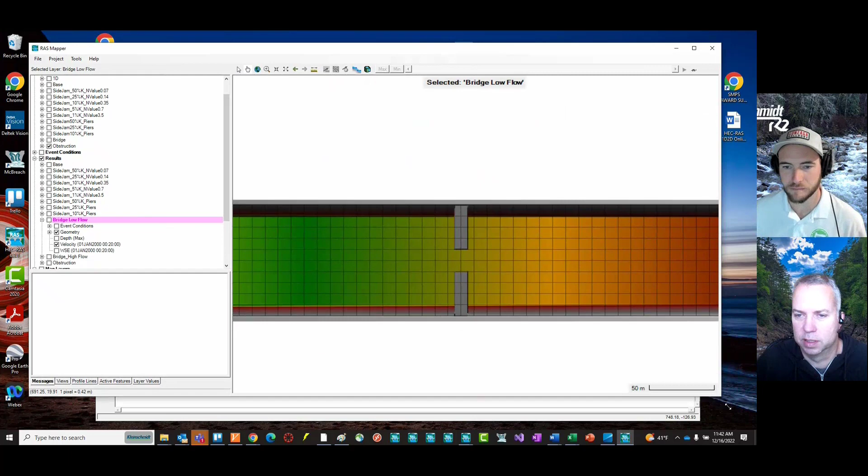Agreed. So let me pull up what I built for a demonstration here. I built what I call a flume model, but this is just a trapezoidal flume. It's 1 kilometer long, but the length is really irrelevant. It's just a trapezoidal channel, right? And so with nothing in here, it just flows straight through. Pretty boring stuff. But what if we wanted to simulate bridge embankments?

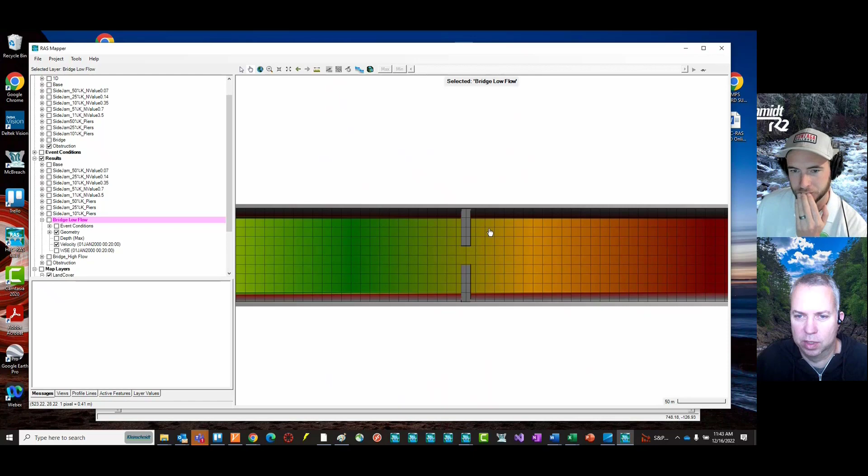And so you've got this embankment on the left side and on the right side, and you've got water that's going to be coming downstream, and it's going to contract to go through that opening and then expand out again. And we would expect to see flow in these corners that is not actively moving in the downstream direction. So let's take a look at that. So here we've got flow that's squeezing through here. And if I turn on my particle tracing, you'll be able to see that a lot better.

So there you can see how it's contracting to go through that opening and expanding at the downstream side. You can even see some eddy patterns right here. Okay, so here's the eddy line, right? And so here's the contraction. You don't really see a distinctive eddy.

Sometimes you'll see a small one in this corner here, but it's able to contract more efficiently because it's a little bit slower on the upstream side. And so usually your contraction zone is a much shorter distance than your expansion zone on the downstream. A good rule of thumb that Ben and I use is 1-to-1 contraction rate and a 2-to-1 expansion rate.

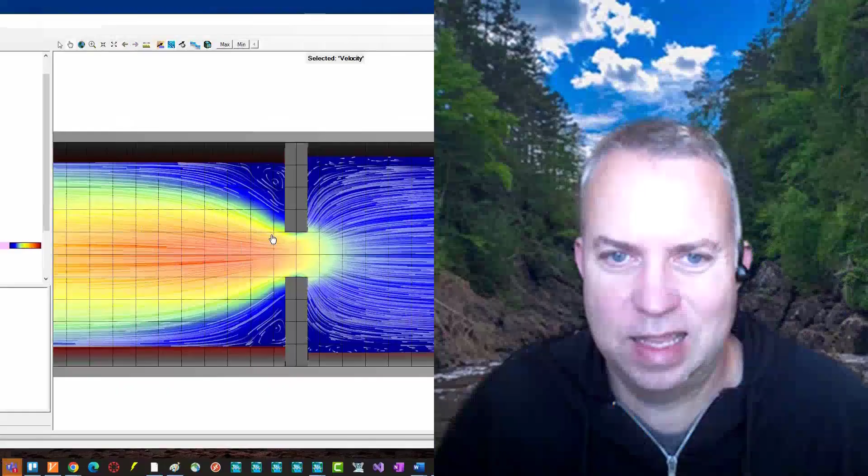That's a pretty common rule of thumb that people use, but really all bridges are unique. All flow obstructions, all contractions, expansions are unique in rivers, so you need to really decide for each case. But knowing nothing else, a good approximation would be a 1-to-1 and a 2-to-1. And you can kind of see that, right? You can kind of see that 1-to-1, 2-to-1 thing going on.

This is a more kind of academic visual of that, right? So Chris's is much more practical with that 2D model, but this is, I think, maybe directly from the HEC hydraulic manual. But this is Appendix B. The 1-to-1 slope on the upstream side of this bridge opening here, and then 2-to-1 on the downstream side.

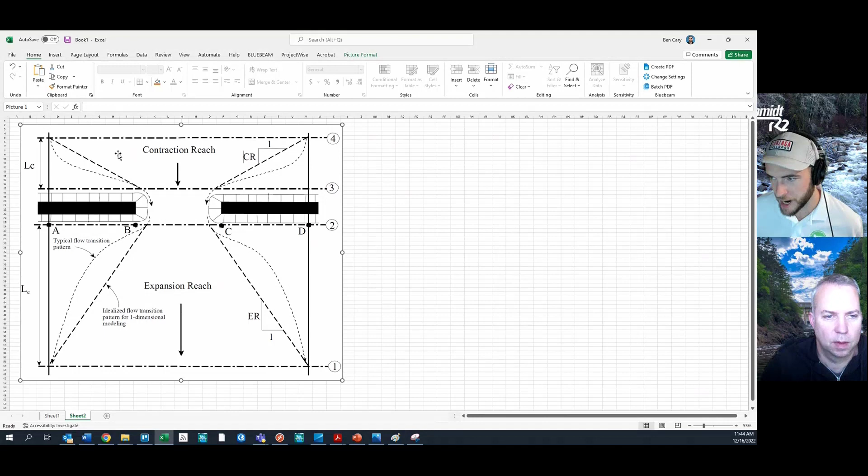And again, this is approximate, so this is a good starting point, but it also highlights how every single project, every single location that you're putting in ineffectives is going to be slightly different. You might have some skew to the bridge. There might be some blocked areas in the middle of the river channel here that change what those slopes are. But this is a good starting point if you have nothing else, and if you don't have the 2D model that Chris is showing here.

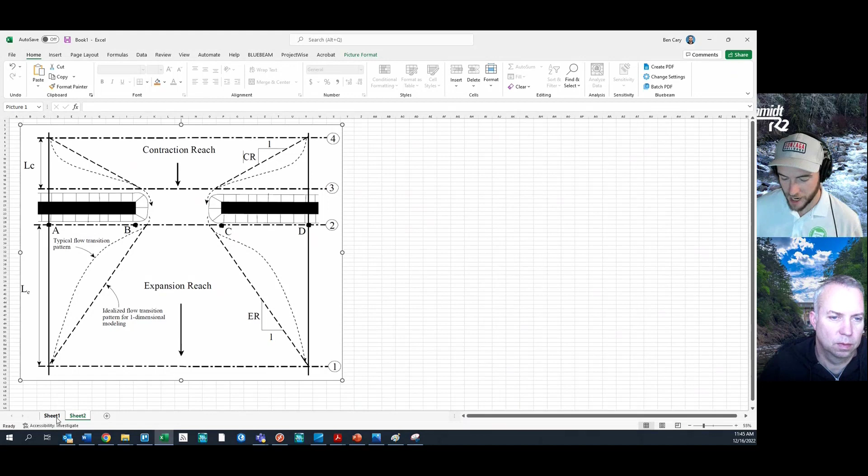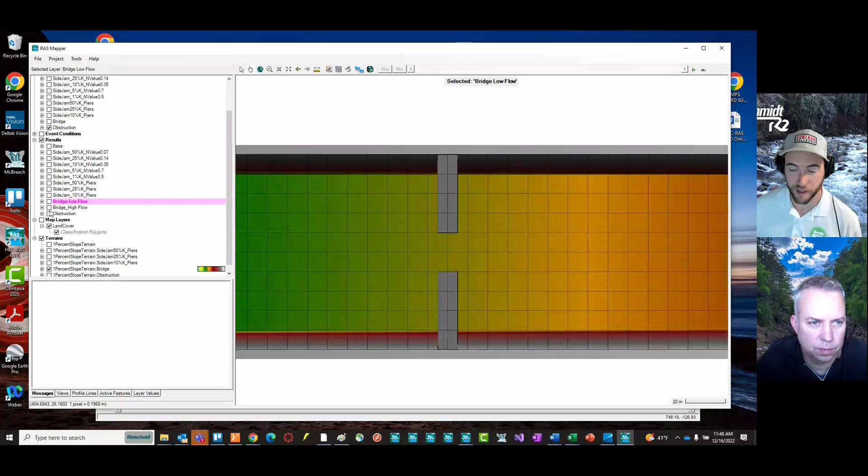So what about a case, Ben, where if the water gets high enough, it starts overtopping the bridge? Yeah, so in that case, first of all, it will drastically change your ineffective lines. And in some ways, it'll completely get rid of them. When we talk about the nuances of applying ineffectives, one of the more important things is to know what the flow level is that you're modeling, because these ineffective lines can change pretty drastically depending on what the flow level is.

When we talk about advantages of 1D and 2D and how those two types of modeling software are beginning to separate themselves, one of the real advantages of 2D is that as the flow level changes within your model boundary, your underlying terrain data and the way you have your mesh set up is going to automatically take into account how those ineffective areas change. A 1D model is going to be a lot more limited. You're going to have to be a lot more interactive with it to represent that appropriately. Yeah, exactly. So that's a huge benefit for 2D modeling.

But if you are doing a 1D model, you want to make sure that you know the elevation at which the ineffective flows will turn off. So if we go back to the low flow example, here we've got it squeezing through the opening, but as water increases in both flow and stage, eventually it's going to get high enough to go over this embankment. And that's what we're showing right here. So you would want to know, what elevation does it start to overtop? A good first estimate is, let's turn on this profile line here so you can see what we got.

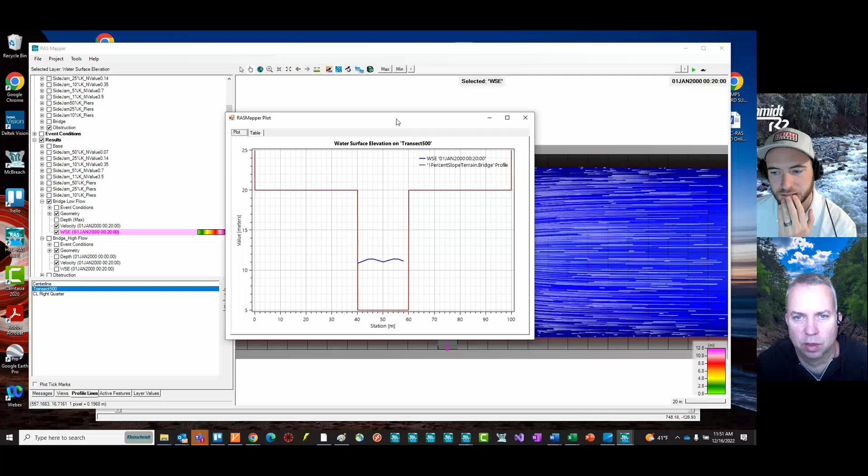And so that's how you set your elevations for your ineffective flows: when do you think that flow is going to become effectively moving downstream? That's when you want that trigger to turn off. So we've talked about how those lines converge towards your contraction or blocked obstruction, and the elevation of the ineffective flow area and when it turns off and flow starts to convey. One other thing I want to touch on really quick, Chris, if you go back to that visual, is the idea of permanency with an ineffective flow area.

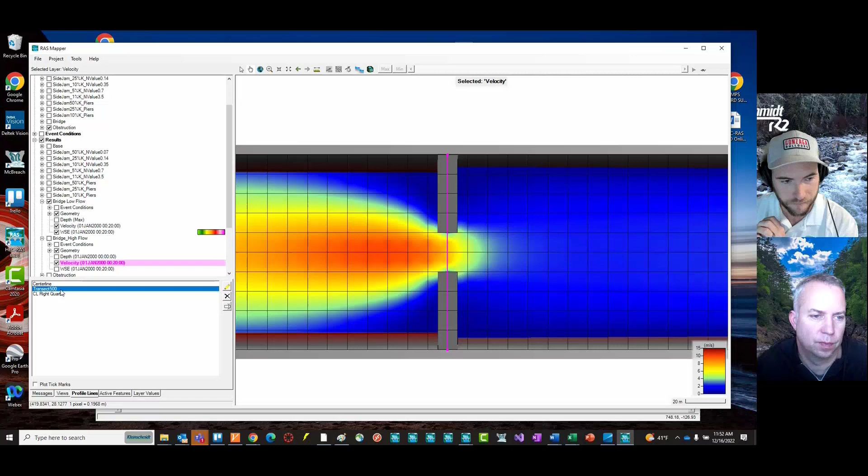So if you open up that line you just had. You're talking about this one? The profile line that showed the water surface elevation compared to the terrain. So if you look at this, like Chris noted, at right around 20 meters, the upstream area is all of a sudden going to start conveying flow towards this bridge opening, and so your ineffective area is going to be eliminated at that point, unless you assign that ineffective flow area to be what's called permanent within the HEC-RAS software.

And I know there's a lot of questions. The most frequent question that I get is, do you use permanent or non-permanent ineffective flow areas for an example just like this? And it depends on a lot of things. That's what I always tell folks. The most important thing is, what's the distance between your last cross section where you have ineffective flow areas and that structure that is causing the ineffective flow area?

Because if that cross section is right up against, maybe just a few feet or a few meters from the bridge deck or from these abutments, it's reasonable to assume that the ineffective flow area you have there is permanent, which means all of the area in this case that's being blocked by those abutments remains ineffective.

But any area that's above that, any water that's above this abutment deck in this case, would be effective. So it's kind of combining the two. And that's a realistic picture, because if you were, for instance, to swim underwater up against a bridge deck that's being overtopped, that water below the top of the bridge deck really isn't effective. It's not moving through that bridge deck. It's only the water moving over the top that's actually effective.

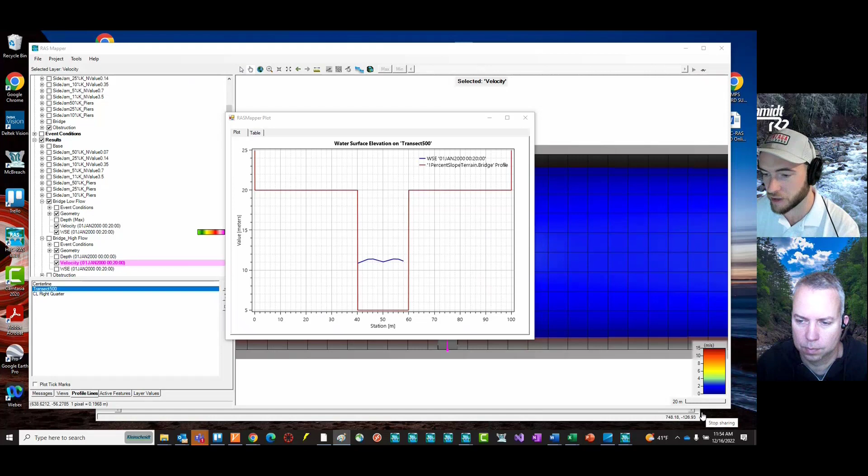However, the opposite case, where that cross section is actually further away from the bridge deck, you might have that entire water column that is suddenly becoming effective if you're overtopping that bridge. So any other thing you want to add there, Chris, or thoughts about permanency? Let me, I always like to explain this with a sketch. So I've got a sketch going here.

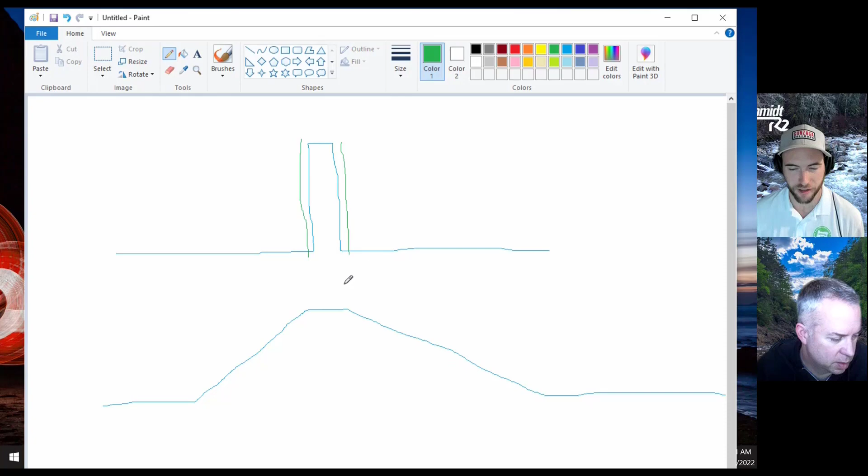And so here are the two cases that Ben was just talking about. So this is profile view, water's moving this direction on both of these examples. This is the bridge embankment where we've got vertical walls, embankment walls, and here's one where we've got sloped embankments. Now, where you're going to want to put your cross section, let's make our cross sections green, is, for both cases, you want to get them as close to the bridge, or whatever the start of the structure, as possible.

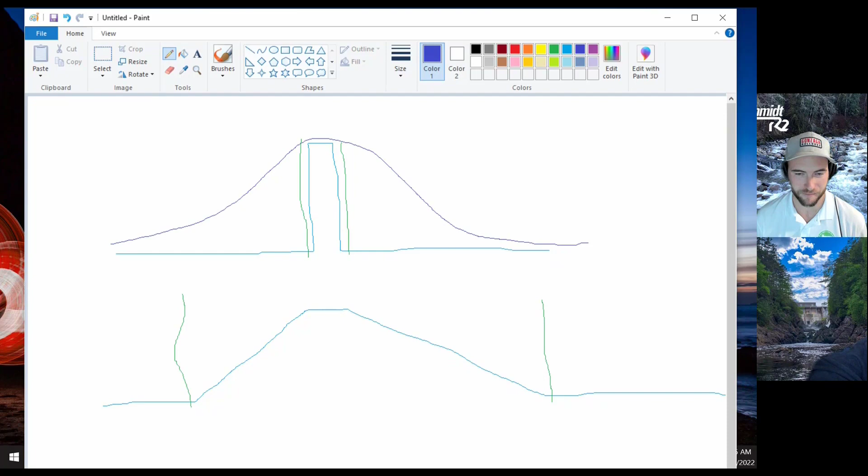And in this case, we've got all this embankment here, so we would want to put it near the toe of the embankment on both sides, right? All right, so, that's a bad cross section, but you get the picture. So again, this is profile view, so we're looking sideways at it. Now, if I were to draw the flow lines, okay, in this first example, you've got flow lines that are going to kind of do this, right? It's going to be something like that, right?

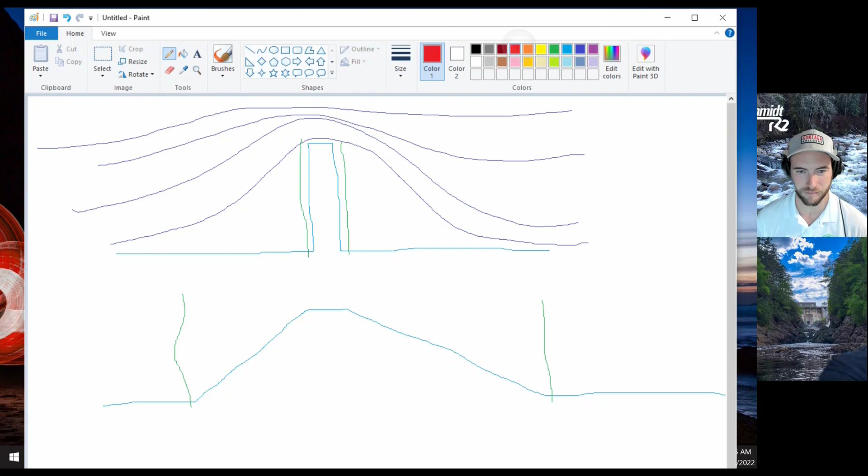So all of this over here is ineffective flow, but just kind of in a sideways perspective versus plan view perspective. So in these cross sections that I have here, these two green ones, even though it's overtopping the embankment, this is ineffective still. So we would call that permanently ineffective. Now in the case down here, if we go back and draw our flow lines again, they're going to look pretty similar, right? But because of the position of the cross section, we won't have permanent ineffectives on there.

As soon as it starts to overtop, you would want to make these non-permanent, so they would turn off, because the entire water column would be activated. Does that kind of capture what you were talking about, Ben? Exactly, Chris, this is beautiful. I have a couple things to add here. So on that upper figure, go ahead and draw another cross section upstream that we would have the ineffectives as non-permanent. So just far enough upstream and just far enough downstream. So exactly there. And then if you draw another one downstream.

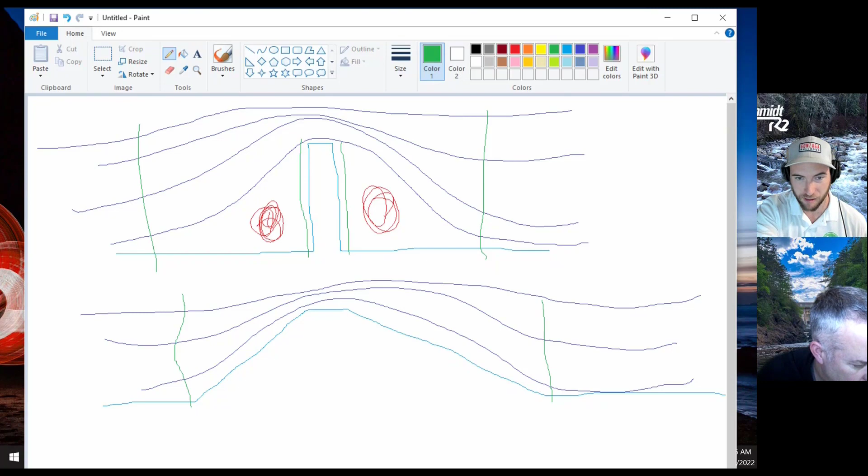So in this case, both the cross sections that are right up against the structure and the cross sections that are a little bit further out, those both might have ineffective areas drawn on them before that structure begins to overtop. But once that structure begins to overtop, now all of a sudden those outside cross sections are going to be non-permanent. So those are going to see active flow when that's overtopped.

And then the interior cross sections, because of the shape of the structure they're representing, are going to remain permanent ineffectives. And so this does a good job of highlighting how that changes versus, again, if you look at the lower figure, all your cross sections, both right at the toe of the structure as well as ones upstream and downstream, those would all be non-permanent ineffective flow areas. So this is a great visualization.

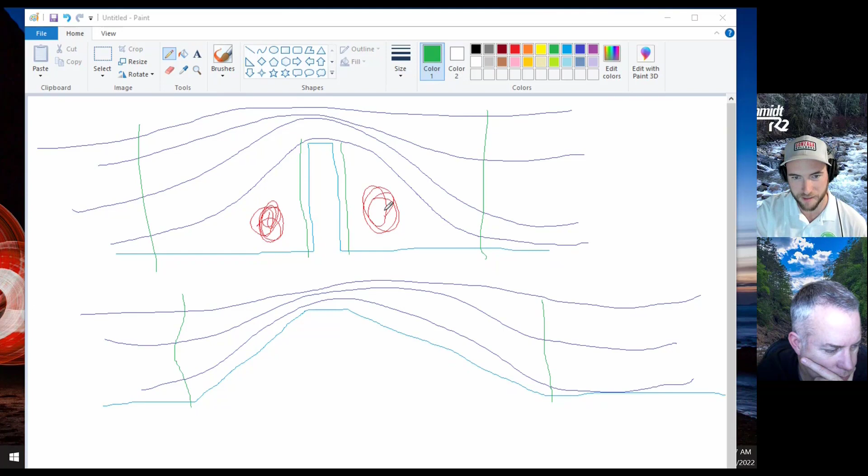The other thing I want to point out, which is fascinating, Chris, I didn't think about this until you literally drew it right here. You said that this was looking in the side view, not plan view, in terms of the ineffectives, and the red circle area that you drew represents the areas that are non-conveyant. But if you actually flip this and pretended that that was the abutment, and we're looking at it from vertically, it's the exact same. And so that contraction of flow moving over the top of this weir is almost the exact pattern that you would see of flow contracting through a bridge opening from above.

So really, no matter the perspective that you look at it, you still kind of get that similar ineffective area, either right up against the structure if we're looking at it into the page, or on the upstream side as water conveys through that contraction. So that's pretty interesting.

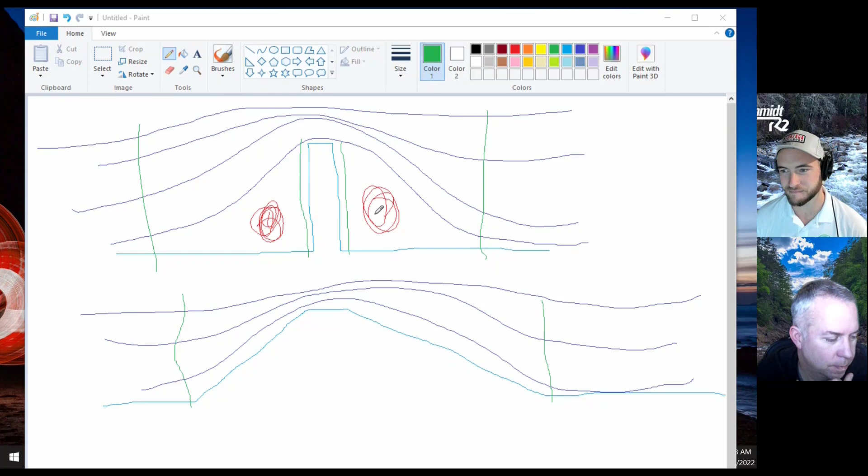So you get both vertical and horizontal contraction and expansion of flow. And we need to account for that in RAS because we have a 1D model. We don't have a 2D or 3D model when you're doing 1D RAS with cross sections. Yeah. So let me show you another example.

This is the case of an obstruction in the middle of the river. Kind of the same type of thing, only here now, instead of squeezing through the middle, you have water squeezing through the outsides of the channel. And this looks very similar to that image that I showed almost at exactly the beginning of the discussion, right? Let me pull this up here. Looks exactly the same, doesn't it?

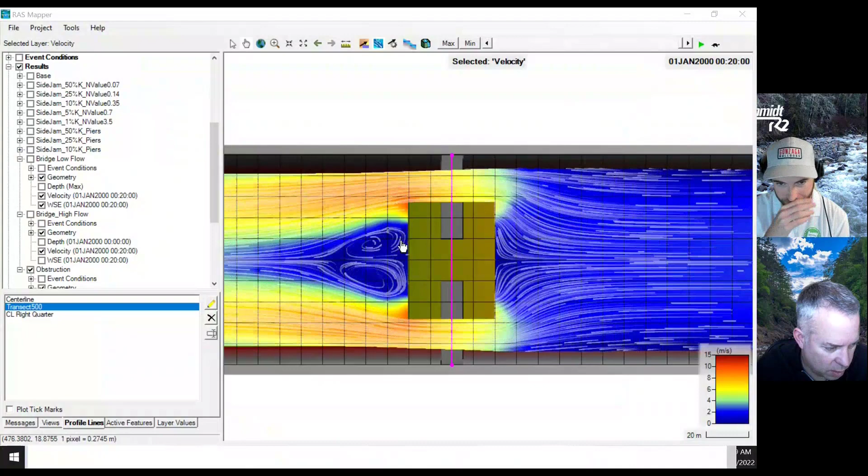And so here again, if we were to put a cross section right upstream of this obstruction, which is what we would want to do, then we've got some ineffective flow right about in here. Same thing just downstream of that. We've got ineffective flow here, and you can see this is maybe a little more than a 2-to-1 expansion. And this is probably a 1-to-1 contraction roughly. So you could set that up too on those cross sections, just like you did with the bridge.

Yep. Now, last thing I want to get into is a little bit more advanced discussion on ineffective flows and certain applications. So with that, I'm going to get back into my canvas here, do some painting. Let's get rid of all this stuff. And I'm going to draw a plan view of a river. We'll make this brown because that represents the banks. And let's say we got some kind of feature that sticks out here like this, and it comes back around and goes downstream. This is what you might call a backwater slough, right?

And we're going to have some cross sections all throughout. The water's going this direction. Okay, so let's put some cross sections. I'll put one here. Oops, I just drew it the wrong direction. I'm so embarrassed. Let's do it the right direction. You'll get a negative flow on that one, Chris.

There we go. Yeah, left to right is if you're looking downstream. Okay, so this is how I would draw these. Make sure you want to capture that feature. Maybe you got another one here and then another one right before it ends, and then another one right after, and then keep going downstream, right? Yep. And so this inside of these brown lines is all water, and you've got water actively moving downstream.

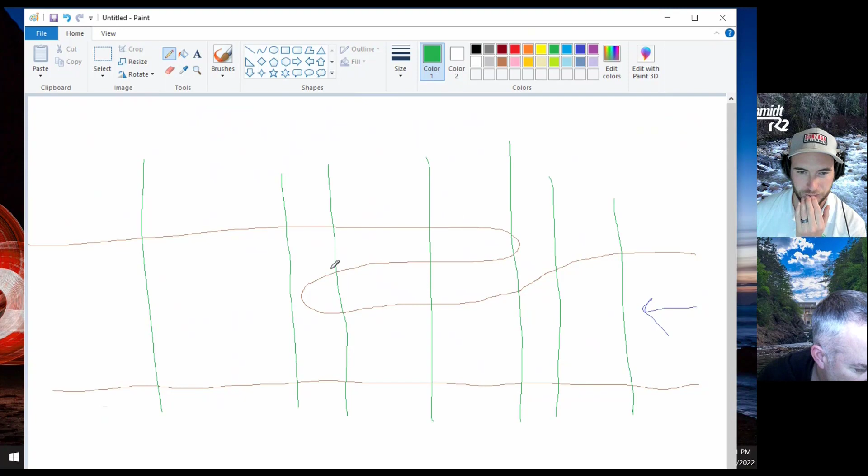But if the water's low enough that there is a barrier to flow right here, then you'll get water up here, but it's just going to be stagnant water. It's called backwater, right? That's why it's called a backwater slough. And so on these cross sections, I would want to define this as ineffective flow right here and here and here. So do you want to draw those locations where you would put those ineffective points on these cross sections? So we'll make our ineffectives in this case orange, and I would put ineffective right there.

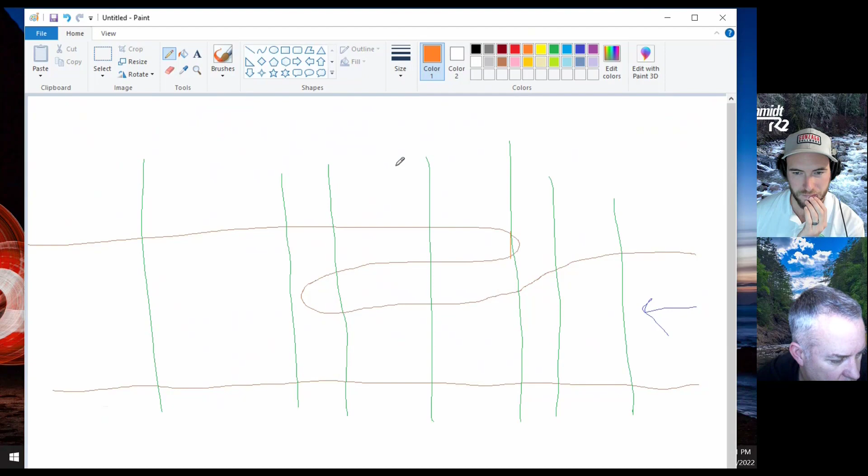Oh, let me do something different here. I'm gonna make them nice and thick so you can see it. Okay, put some ineffective. Oh my gosh, I messed that up. There, and there. Yeah, I think you get the picture. Right. So those are my ineffective zones, and I would do these with probably blocked ineffectives, or you could probably have it go all the way across, if this ground is high enough. So those are my ineffectives.

But what about the case where water starts to get a little bit higher, Ben, and now it's doing this? It's not only going downstream, but it's also coming in like this. Yeah. So now that would be again a case when we talk about setting those ineffective areas. It's going to be based on identifying that that's a backwater slough. So the location that you have is perfect, Chris. The only other thing to consider is the elevation that you have those at, right?

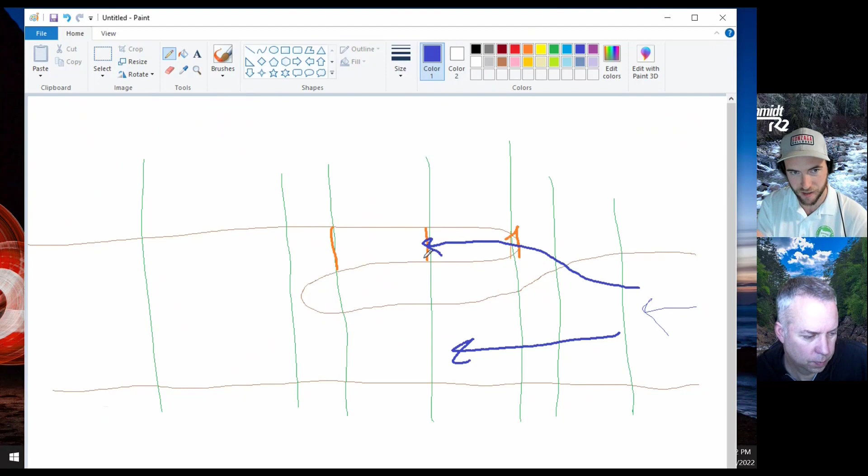Exactly. So we're going to want to tie those elevations in with the elevation of the ground just upstream of that cross section. So I don't know if you want to draw maybe a red line along that ground feature where you'd want to pull that elevation from to establish the elevation of those ineffective flow areas. So it'd be right along there, exactly.

Something there, take your best guess, but the reality is you're going to run the model and then you're going to come back and check, because what you're going to want to do is see when does water first start going over this high ground feature, and whatever the water level is at these cross sections when it first starts doing it, that's how you would set the elevation of these non-permanent ineffective flows.

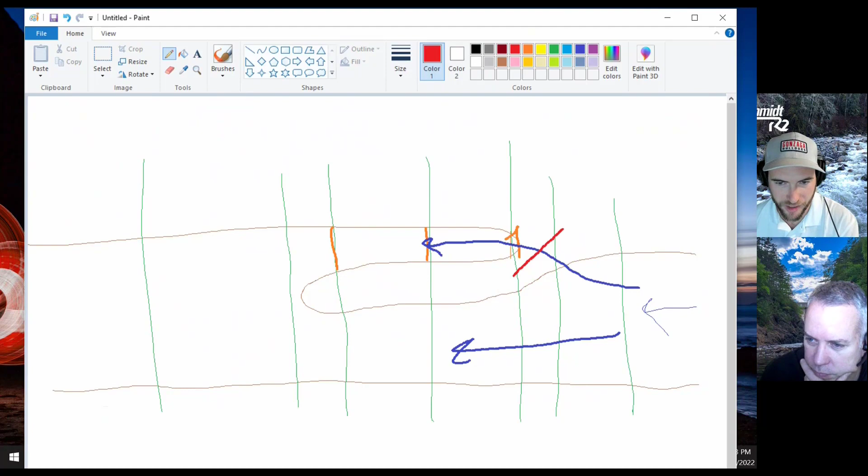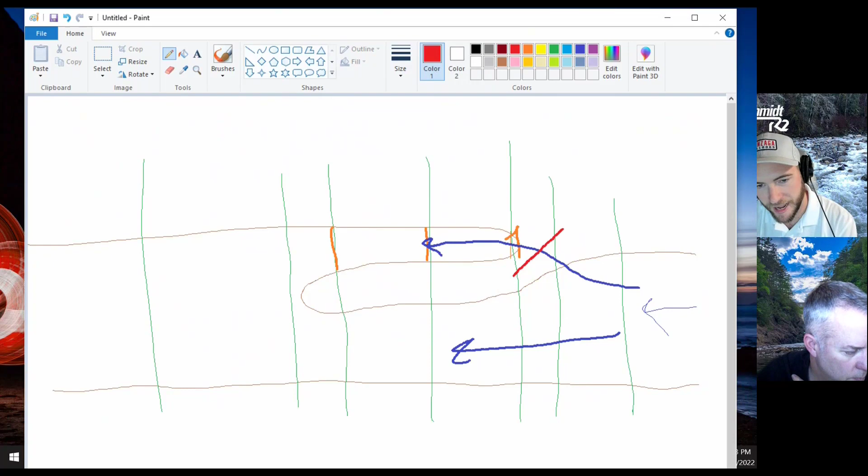Yep. And the only other thing I want to add to this particular image is one of the things that I see when I review models from people, which is oftentimes people will just go ahead and add that high ground peninsula that you have there. They'll just add that in as a levee with the assumption that, hey, water's not getting over there, particularly if that's not a backwater slough. Maybe it's just a low valley or whatnot behind there. And they add levees there to restrict water from getting over there.

But that is problematic, because if water gets high enough to overtop that high ground feature there, you're not going to be accounting for the fact that now all of a sudden that area is effective in terms of what the flow is. So let's draw your example, right? Okay. Yeah. So here we have this low area over here, right? Yeah. And this high ground, and this could be a levee, it could just be natural high ground here. And we've got our cross sections right here.

Oh, I drew it backwards again. Oops. Oh well. So embarrassing.

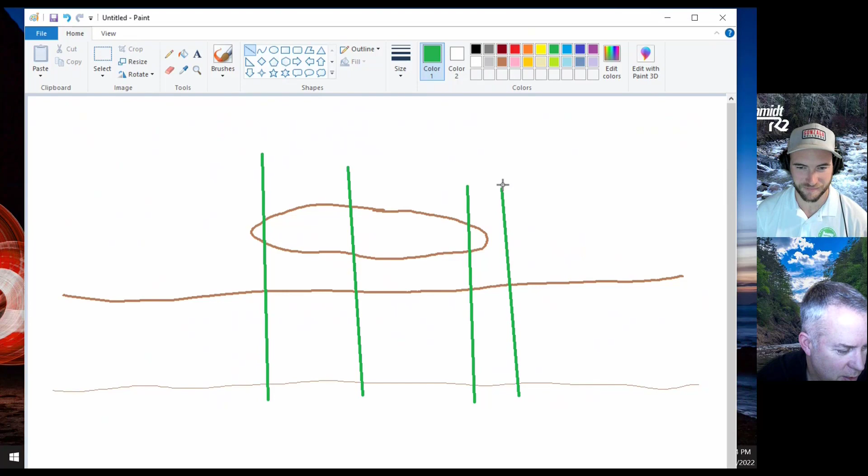Here's our cross sections, and then we got more upstream and downstream. And sometimes this is even lower than the invert of the main channel. I've seen that happen before. It gets a little bit weird. But before water goes over the top of this, we would not expect to see water in here unless there was like groundwater seeping in, right? But you would not expect water to be able to flow in here from the river until it overtops that.

And so, Ben, what you were saying is, in that case, we'll just call this my symbol for levee markers, although in RAS it's a pink triangle. But anyway, so we would want to put levee markers here, and what that would do is that would prevent water from going over into this area until the water on this side gets higher than these levee markers. Then it's able to spill over there. That's one way to do it.

But my caution with that is oftentimes people will put levees there thinking that water's not going to get over into that low area until the water overtops that levee or that bank, but they don't look upstream and see if there's a lower elevation that would actually activate that low ground feature on the right bank. Yeah. Can it do that, basically?

Exactly. I really caution folks, if you're finding yourself using levees, I caution against it unless it's a clearly defined certified levee structure, because there's a lot of different ways that water can get in there upstream, and all of a sudden that area should be conveying water and you don't have it represented as so. Because computationally, Chris, correct me if I'm wrong, you're not going to get different water surface elevations, different depths, different velocities in the channel if you use an ineffective boundary or a levee. It's going to have the same results in the channel.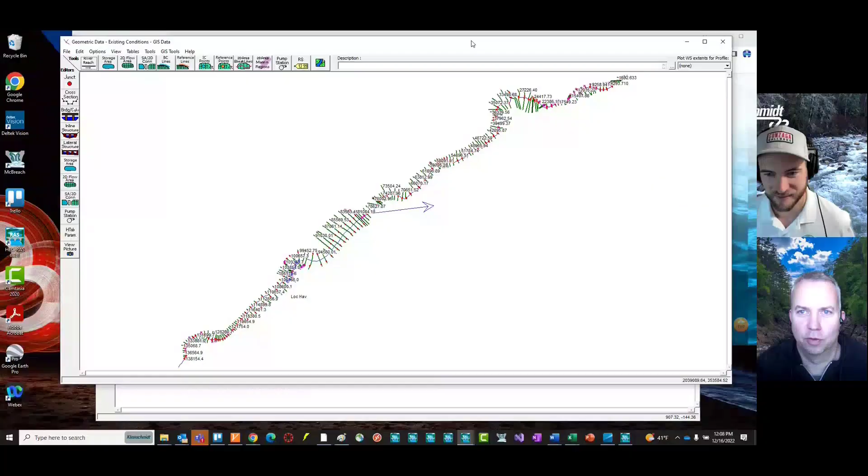Agreed. Yeah, nothing is more of a nuisance than an overcomplicated model, especially if you're reviewing it and trying to understand what the heck is going on.

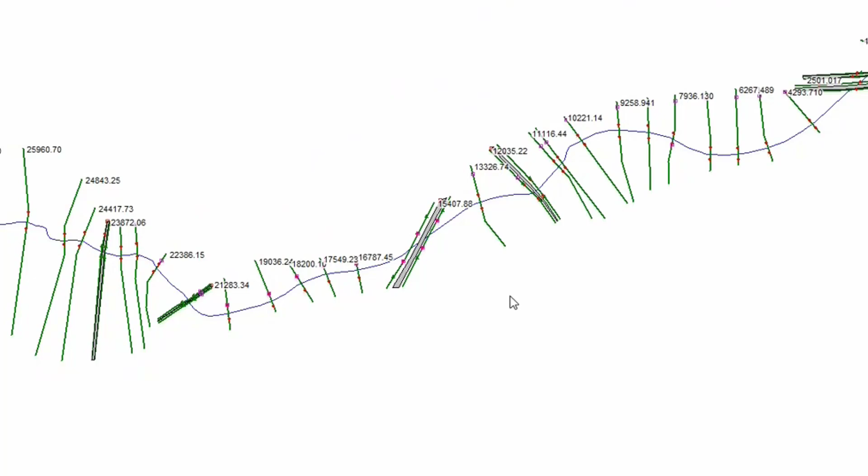But just to wrap up, this is the Bald Eagle Creek example. Everybody gets this with the software; it's one of the example data sets. If I zoom in over here, you can see these pink squares. I call them triangles, but they're actually squares. Those represent levee markers that we were just talking about. And if you look closely, you can see some green triangles around. A lot of them are on either side of these bridges that you see here. Those are ineffective flows.

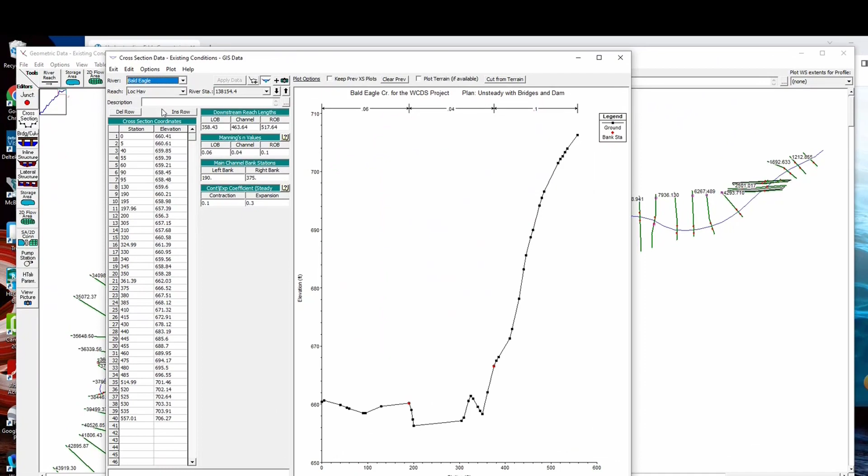So how do you set your ineffective flows? Well, there's a few ways to do that. If you go right into the cross-section editor, you can see under options, there is ineffective flow areas. And this pulls up what I would call kind of the old school way of doing it, where you type in your left and right stationing for your ineffective flows and the elevation that goes with it. So if I wanted to put something around, say, 180 and another one around 320, and then maybe I set them both at 670 for my elevation, click OK. And there's my ineffective flows.

Okay, that's saying everything to the left of this one and everything to the right of this one is going to be ineffective until the water gets above that level. Unless you go in, let's double click on this. This will take us back to the ineffective editor. If I turn these to permanent, now they will remain ineffective even when the water is above it.

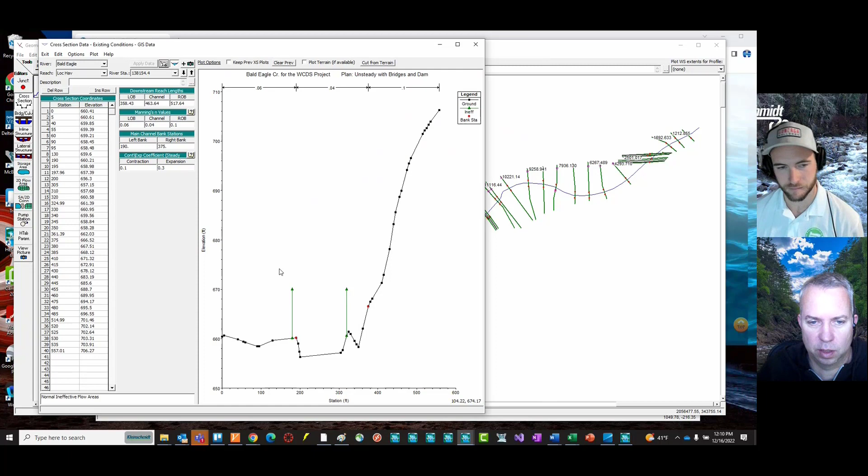Okay, so if you click OK, Chris, you can see the visual difference too, because I believe that area becomes hatched. It does once you have output. Because I haven't run this yet, it's not going to show it as hatched yet. But yeah, you're right. If the water's up above it, it will show this as a green hatched out area if it's permanent. If it's non-permanent and the water's above it, then that hatched area will go away as soon as the water gets above these elevations. So that's kind of the old school way of adding them in, and you do them one cross section at a time.

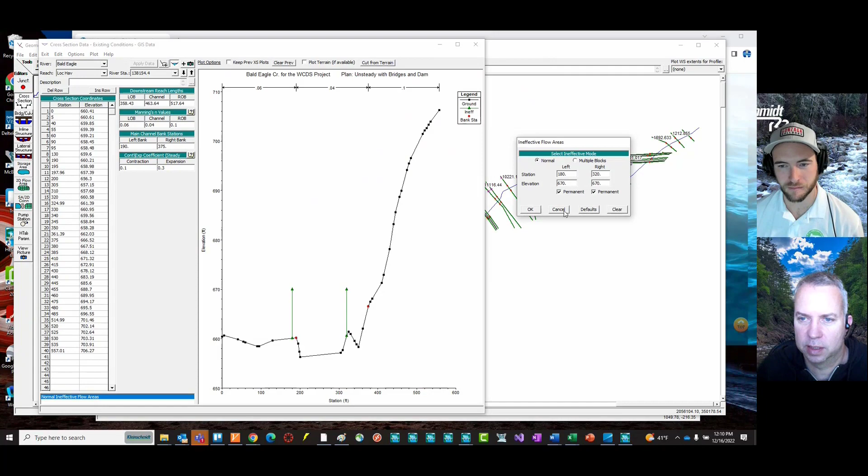There's also a multiple block option here, which gives you a little more flexibility. It also is a little bit more cumbersome to add these in. So let's clear those old ones. Oh, it's already cleared. Okay. And then I'll show you how you do a multiple block. You put the starting and ending stationing. So let's say we'll go 50 to 100 on here. We'll use the same elevation, 670, and we'll say N for not permanent.

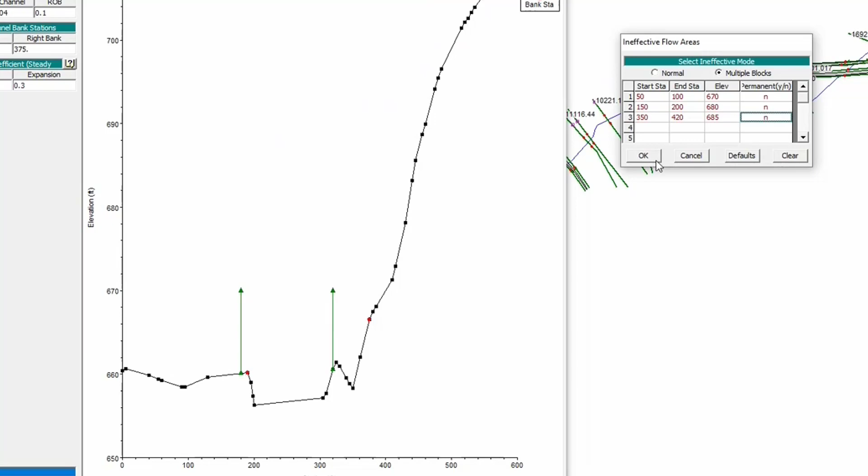And then maybe I want another one at 150 to 200, and we'll make this one a little bit higher. And then maybe on the other side, I've got like 350 to 420, and we'll make this even higher. And we'll put N's on all of these. And usually you're going to do multiple blocks if you have some sort of sloped structure that you're trying to capture the sloped ineffective area that you'd have.

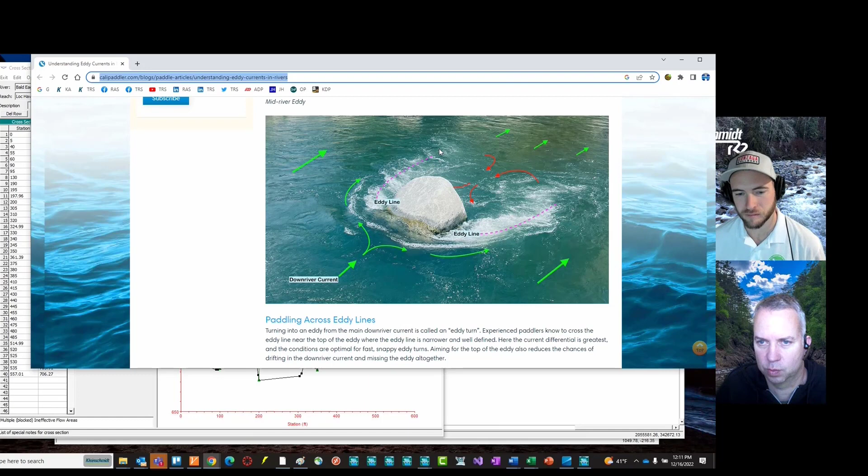You probably wouldn't have a gap in between those two on the left unless there's a hole in your structure or something. Yeah, that's if you're doing a structure, but these could represent other obstructions like a building. This is the shadow, like the example I was just showing you. So that's like a floodplain model, and you have buildings or something. So here's where you would use a blocked obstruction, because you wouldn't want this to be ineffective or this to be ineffective. You just want it in this one single block. And so that's kind of what we're seeing right here. Imagine this is a big boulder in the river, or this is a house, something that's blocking flow.

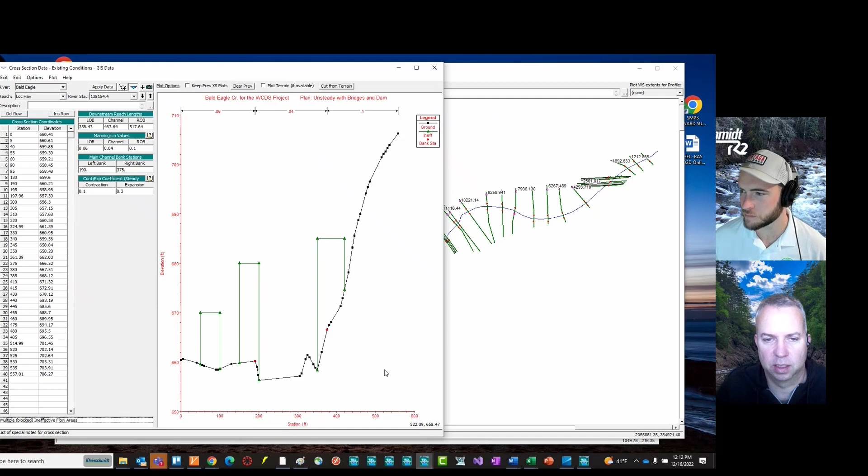So that's how you do it in the cross-section editor. But if you look at this button up here, this takes you right to the graphical cross-section editor. This is so much easier. Now, you don't have the same level of precision, but I can put in and adjust my ineffective flows. I'm already in move mode, but if I right click on here, I can add more blocks. Maybe I want to put a block here.

There. Maybe I want one here. Okay, I would never propose doing this. This is crazy. But so I'm going to delete all these. I think I have to click on them. So you can do all this stuff just by clicking.

Now, if I get this back to what it was, I can right click and I can go add a normal ineffective, and I just have to go boom, boom. Oops. I thought that was the left one. Got to get outside of the bank stations. Bank stations, yeah. So those are mine, and then I can go to the next one, and I can go boom, boom, like that. Now, again, you're not going to have the same level of precision, but it's a really quick way of setting your ineffective flow.

And the reason I like this, Chris, is if you do a side-by-side of the geometry data editor and this graphical cross-section editor, so you have both, you can quickly add them and then look at what the lines look like in the geometry data editor. So you can kind of see, hey, do I have 1-to-1 slopes on the upstream side of this contraction? Do I have roughly 2-to-1 slopes on the downstream side? And adding those in quickly is a great way to get those lines in place.

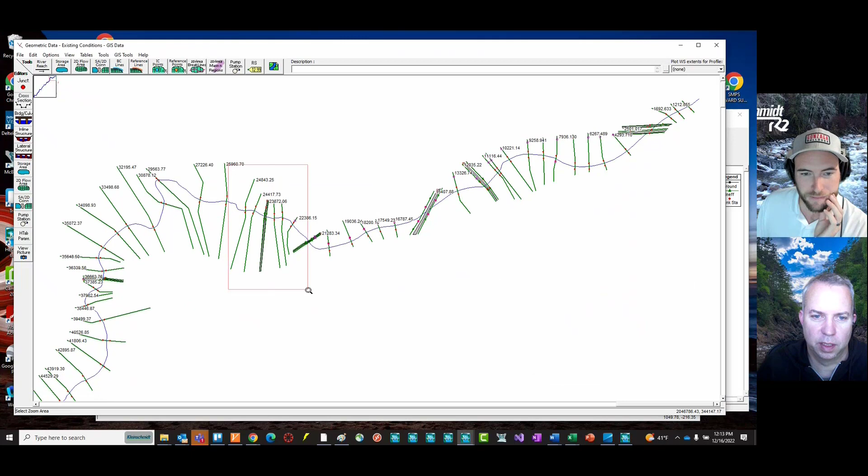I don't know if you have the ability to show what I'm talking about there, but if you do that and you get your lines drawn in where you want them, then you can go back into the detail cross-section editor and actually adjust the elevations to what they should be after you've drawn in the lines themselves. Yeah. So you're talking about using this plan view here to see the contraction and expansion, right? Exactly, as you draw those in the cross-section editor. So yeah, you could zoom in here, and let's say that we wanted to show this 1-to-1 contraction here and 2-to-1 expansion. Let's do the expansion.

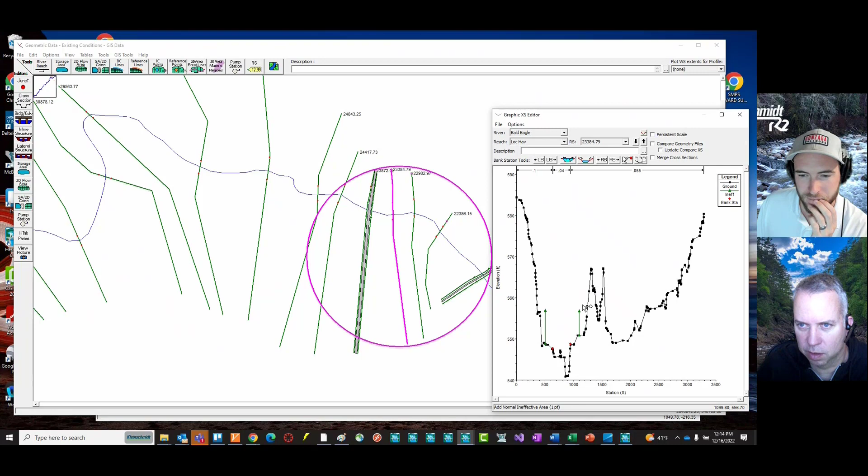So I can come over here and go to graphical cross-section editor. Here's my main channel. Get into normal ineffective mode. Okay, I know it's going to be a little bit wider than the bank station, so maybe I put one here and one here. Yeah. Then arrow down and back up, and let's see where it shows up. There you go. So that actually turned out pretty good.

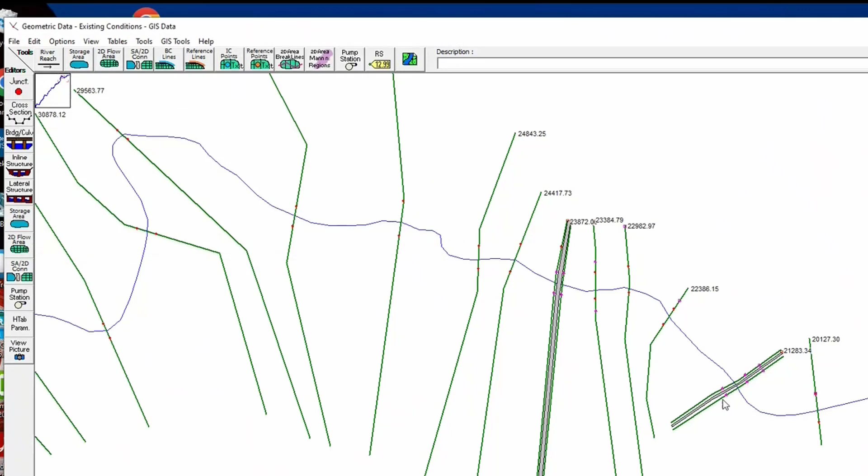What I like to do too is I like to change the color of those so they're easier to see. Yeah. In this case, so I'll go to edit lines and symbols, go down to my ineffective. Where is it? Right, you see it. It's right there. It's right above the hatching. Schematic ineffective. Yeah, and I changed the symbol color from this color to something like red. Red, well, that will look like pink. A bank station. So yeah, pink will be good. Anything that's contrasting. Yeah. And then a lot of times I'll make them bigger too. So let's do that. Lines and symbols.

Schematic ineffective. It's definitely one of the biggest mysteries for HEC-RAS. We should do an episode sometime on the mysteries of RAS decisions, because making the triangles for ineffective green has to be one of the most perplexing things. I have no idea why they did that. It's kind of weird. You could have picked any color.

But yeah, I think changing the color and getting those bigger is an awesome way to be able to see them more clearly. And then like Chris is doing right here, you draw those in, see that your expansion contraction, that looks great. And now you would go back into the detailed cross-section editor, Chris. So if you go back. Let me move. I want to move this one. Oh, okay. You got my OCD triggered here. So I gotta get, okay.

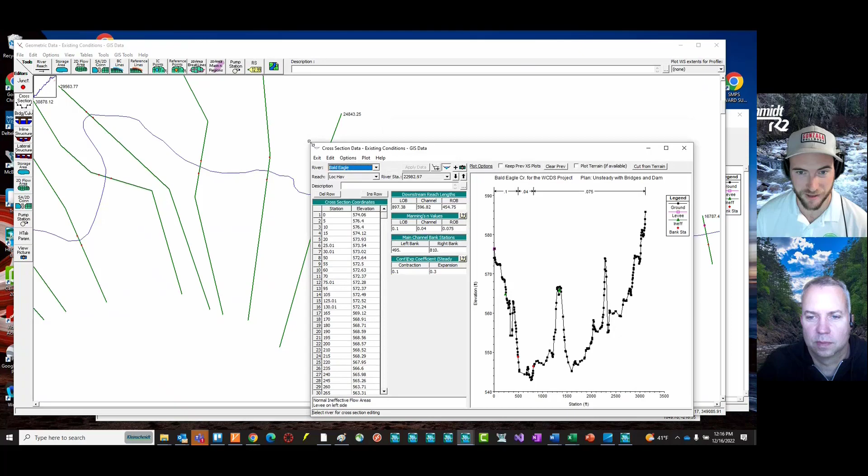So now if you go back into the detailed cross-section editor of those cross-sections, now you would want to adjust the elevations of your ineffective. So if you go to options, ineffective flow areas. So now you'd want to adjust those elevations based on the elevation of your bridge upstream, which is causing that contraction elevation. So it's a two-step process to get the contraction expansion lines drawn in correctly, and then get the elevations correct based off the structure information that you have.

So yeah, this one's already set at 566, 564. So a good first cut would be just to adopt those, and we'll go. You know, what was it? 566 and 564. Yeah, so you would change that to 566.

564. Now you would definitely want to run this and double check that's making sense. But this is a good first cut. It's a lot easier to draw those in the graphical cross-section editor as opposed to trying to type in what the numbers are and guess. It's too cumbersome. So I like doing it exactly how you did it, Chris. Draw them in and then adjust the elevations later.

Yeah, take a look at this. We got one that's below ground, and that's okay. RAS will still call anything to the right of that ineffective at that elevation. So you can put them below ground. There's no problem with that. And this one looks like it might even be inside. So this one's not really going to be used.

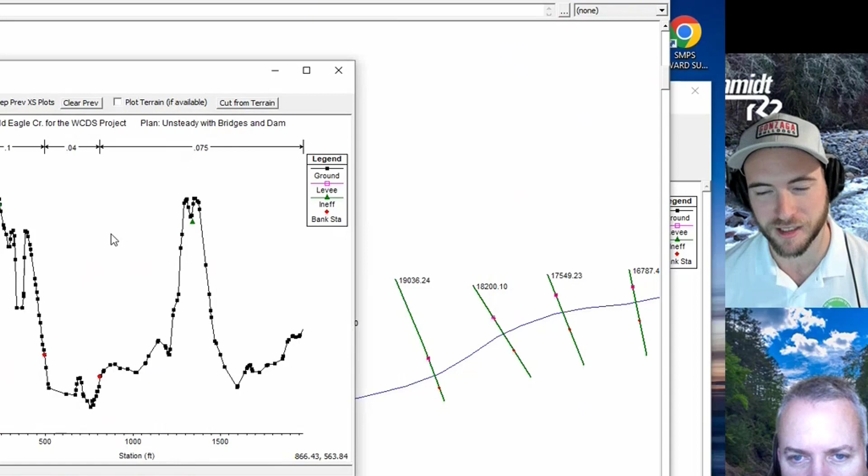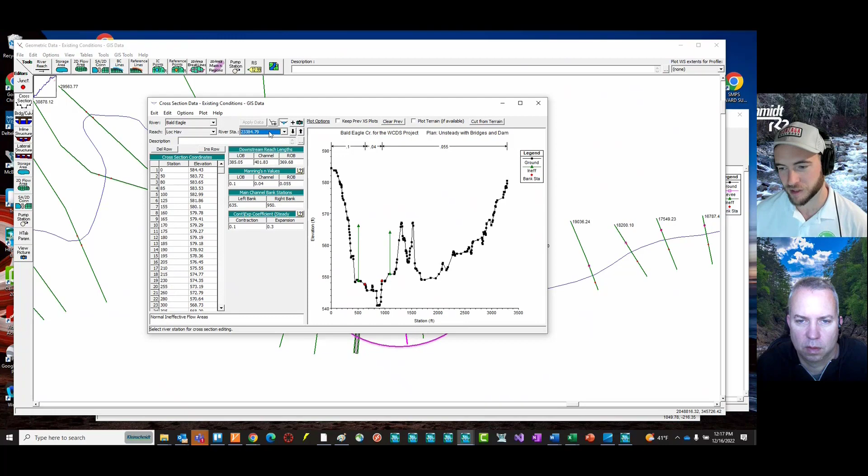But that particular example you're showing there, I would have another question though, which is, hey, can flow get over to the right of that, or does it have to overtop that levee looking feature before it's a good example of how adding ineffectives can kind of build on themselves from a workflow standpoint. You add them in for a structure, and then all of a sudden you realize you need to add them in for some floodplain geometry that you haven't taken into account. So it's an iterative process.

It takes a little bit of time, but hopefully today's video is a good summary, a high-level summary of how ineffective flow areas work, when they're used, how to add them in, and some good things to consider when you're doing so. Yeah. So hope this helps people out comprehend a little bit better the concept of ineffective flows. It's always one of the more difficult things to teach somebody who's brand new to HEC-RAS and hydraulic modeling what ineffective flow means.

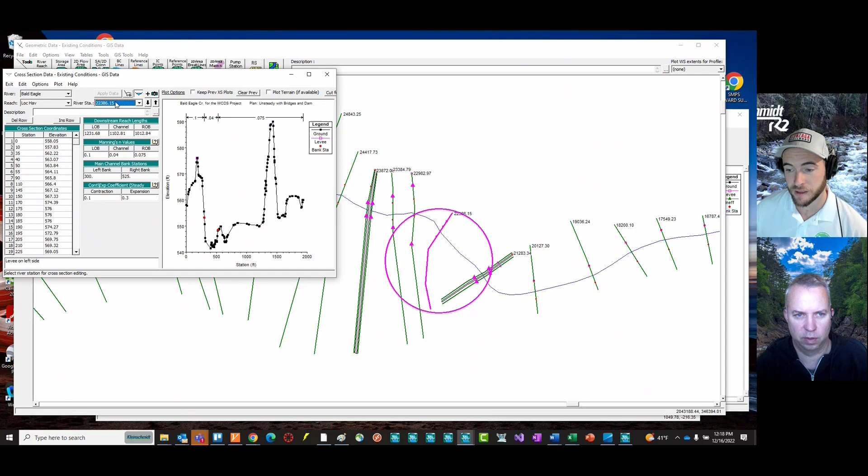But if you're still not sure, get out to the river, look for those eddy patterns, and look for those eddy lines. That's where your ineffective flows get defined. And the more you see that, you see how water interacts around obstructions to flow and how it separates off, the more you're going to be better at doing this in your models.

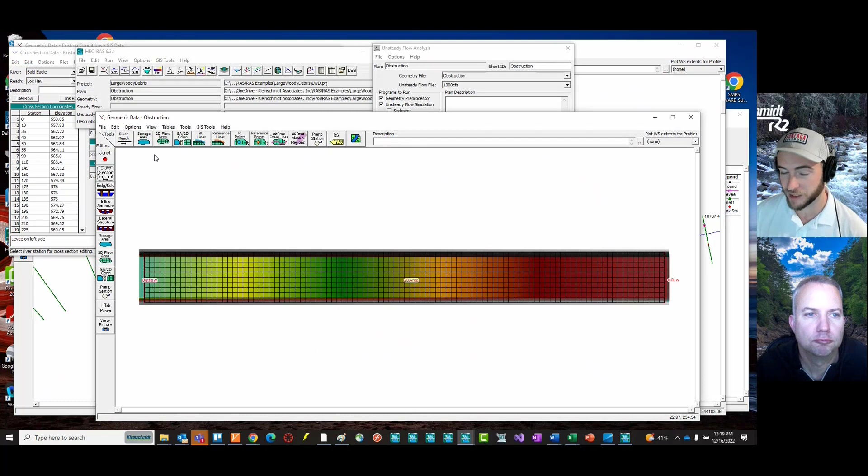Yep. I'll add too, obviously get out on the river regardless, but another great way to kind of visualize how this is working is build 2D models. Maybe not of the site that you're trying to do, but if you have the opportunity to look at a 2D model, run the full momentum set of equations, and look at what the ineffectives are like, because that's kind of like getting out in the river. You're seeing what the hydraulic physics would result in terms of expansion and contraction for particular setups of bridges or blocked obstructions or culverts or whatnot. It's a great way to visualize that.

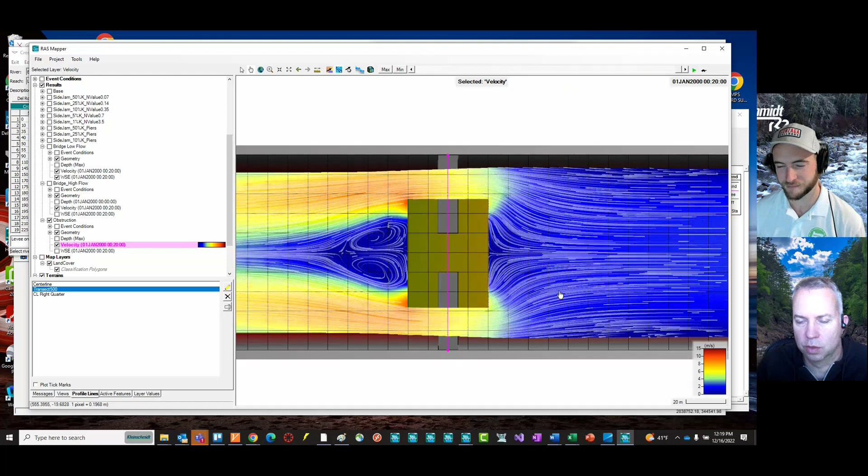Yeah, that was the first thing I thought when we talked about doing ineffective flows for the podcast today as well. How can I visually demonstrate this? Oh, let's just do some 2D model stuff. So, I have this test flume that I reuse for all sorts of things. And I was like, let's just take that and I'll dump some obstructions in there and we'll see how the flow goes around it and show where the ineffectives go. So yeah, it's a great tool. If you can use it to help you define where your cross sections go and where your ineffectives go, then by all means, use it.